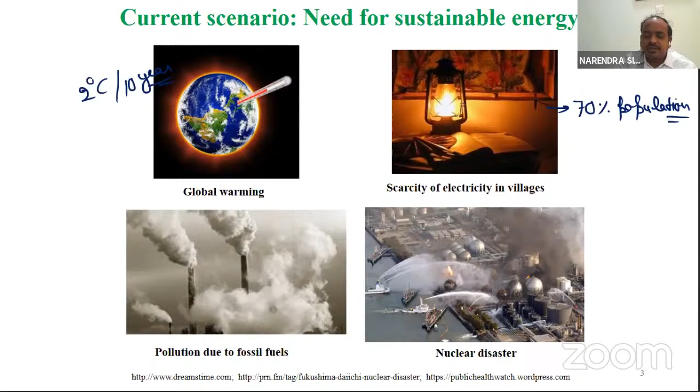Okay, so if I go for photovoltaic, right? Photovoltaic is a direct conversion of sunlight energy, that's light energy, into electricity. And from electricity we can convert into thermal energy and all other things, right? So world energy consumption is around 18.5 terawatt, and by 2015 it will be increasing, right? So here you can see the total reserves like coal, petroleum, uranium, natural gas. That is the non-renewable energy which can be utilized to get our energy, right?

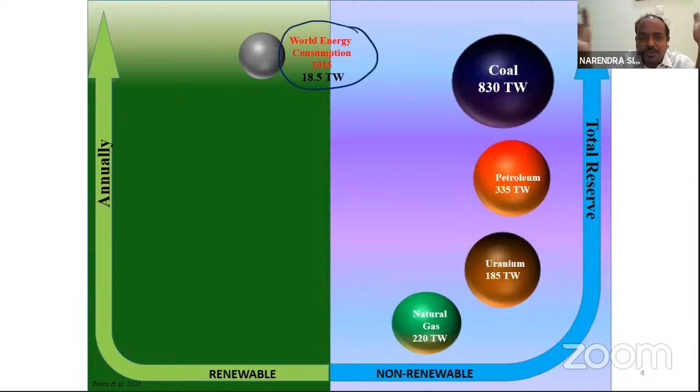So with the increasing population and increasing industrialization, because our life is like that, we need more and more comfortable things, right? But for comfortable things, industrialization will be there, right? For something like a pen, we require some industrial process, and then we require some energy there, right? This is electrical energy or maybe thermal energy; we require this energy, right?

So if I look at renewable energy, there is wind, biomass, hydro, geothermal, and wave energy. Wind energy is a powerful source where we can get the energy which is required for a particular region or maybe the entire world, right? But it will also be dependent on a regional basis, right? Sometimes we may not get too much wind, so that's why the production of this energy is less. Okay, but

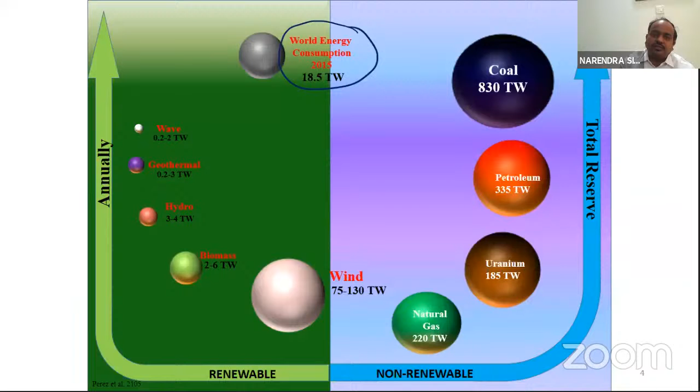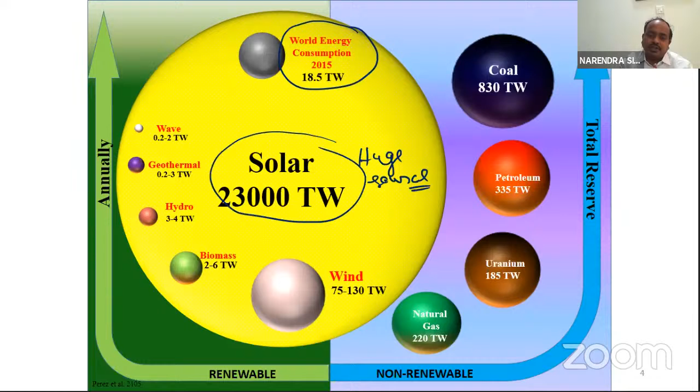if we come to solar energy, right? Here, our consumption is around 18.5 terawatt, but we have a huge source of energy, which, if we are able to extract 1% of it, even 0.1% of it, then we can fulfill the demand of all the energy, right? So let's see how to do that, right?

So how is it working? For that, we require a semiconductor device. Okay, I will discuss a little bit more about this: how photovoltaic generation works, how photovoltaics can be created, right? It is directly this semiconductor device which is converting light into electricity, right?

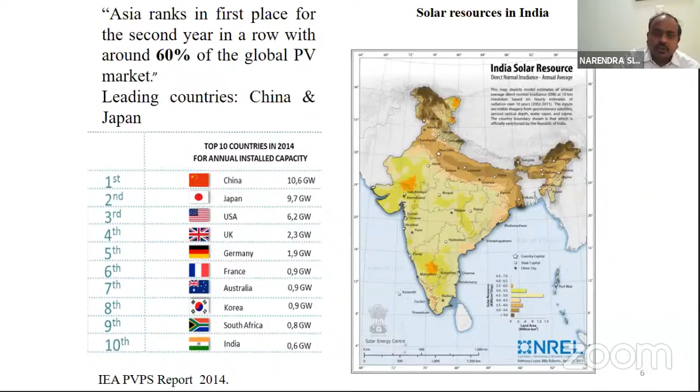So we are very, very far away, but I think right now the government has implemented many schemes on that. So we are increasing our strength, the solar energy strength, right? So yeah.

Here you can see the global scenario, right? Here is the requirement of energy in different sectors like transport, industry, non-combusted, buildings. So it is increasing day by day, right? Because of the increasing higher living standard.

So our global energy demand is increasing day by day, and also the industry sector consumes half of the global energy because they are producing a lot of things, right? Even sometimes when new things come, industry requires huge power.

Okay, so for simplicity, even for kids, a lot of types of toys are there, but to prepare them, we have to establish an industry, and that industry requires huge power. Okay, so mostly industry consumes half of the energy.

And also here you can see developing countries are resulting in more power demand, especially countries like China and India. Okay, so here you can see there are different types of energies, right? Renewable energy has increased in demand over the last few years, because for all other energies you can see the trend is low.

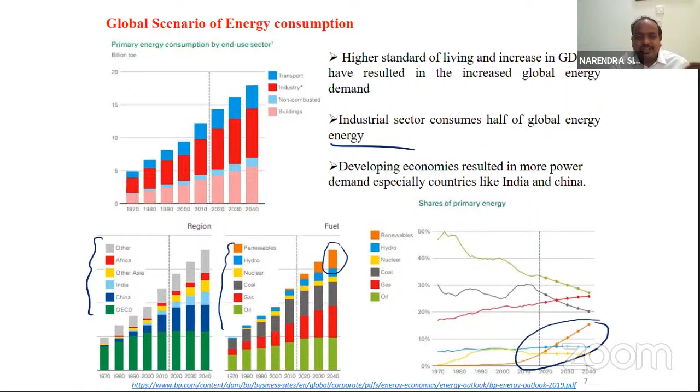In renewable energy sources, there are different kinds. So we will restrict this talk to only solar cells. Okay. So first, how does the solar cell work? Before that, we have to understand what solar energy is. Okay. So if I talk about solar energy, right?

So the sun is there, and then we are getting solar energy here on the earth, right? Outside of our environment, we are getting almost 1302 watt per meter square, right? But that is if it is just below the zenith angle, right?

Okay, you don't need to go into that much detail, but the average we are getting here is around AM 1.5. This is around 1000 watt per meter square, or 952. In most cases you will find 1000 watt per meter square. Okay, that is the energy radiating on the surface.

Okay, so our surface, right? So here you can see, outside there is a lot of energy, right? But due to the environment, there is a decrease in energy, right? So some is global energy, some is direct energy.

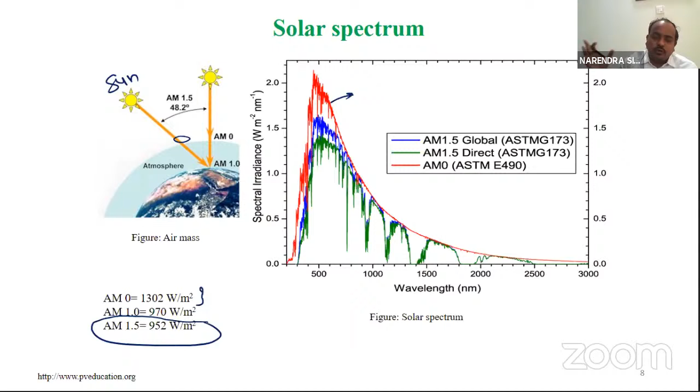Okay, so direct energy, which comes to the surface of the earth without any interference, is the direct energy. And some will come through diffusion by different molecules present in the atmosphere, right?

So here is this famous picture. Okay, I have taken this one from PV education. In that one, you can see that there are different layers. Okay, so these layers actually create some obstruction for that particular light, right?

So some of the light will directly fall on that surface, but some will be scattered due to the oxygen and water molecules in there. So they are reflecting back or maybe scattered. Some will be scattered to space, and some will be absorbed by these molecules which are present in the atmosphere. So energy is absorbed by the molecules.

So here these molecules are absorbing some energy, but a few of them are diffracting, right? So diffraction is happening. Some will be scattered up into space. Some is scattered onto the earth. That is called the diffuse reflectance.

So also here I will say that with the sunlight position the radiation is changing. So with the position the radiation is changing, so how our tracking of the sun should be, right? And if we have fixed photovoltaics at one angle, what is the angle at which we will get the maximum solar energy?

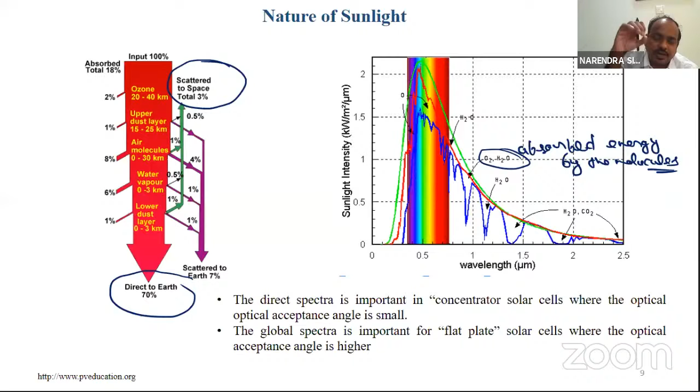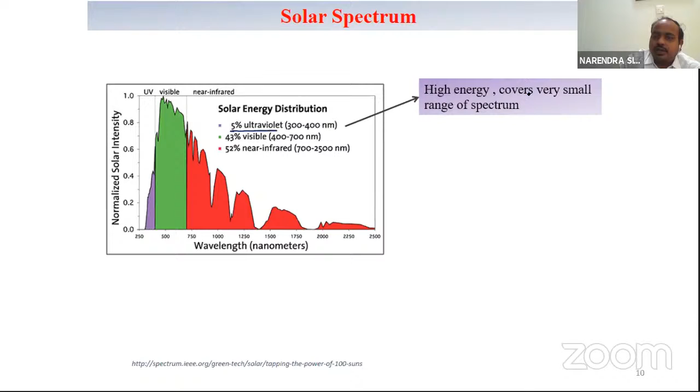So if I talk about solar energy, you have seen solar energy graphs like this one. So here are the high energy photons. When the wavelength is low, it means hc by lambda, right? So lambda is low, then there are high energy photons. It is a very small range of the spectrum actually, only about 5% in total, the ultraviolet.

Here in the infrared, that is low energy, with more optical losses, like heat, right? So infrared is nothing but heat energy.

Jiten? Yeah, I think some disturbance is there.

So here there's another one, yeah. This is the visible light, where there's the maximum possibility of utilization of the light, because it is not low energy. The photon energy is in the medium range. So we have to choose a semiconductor that can utilize more and more of these photons.

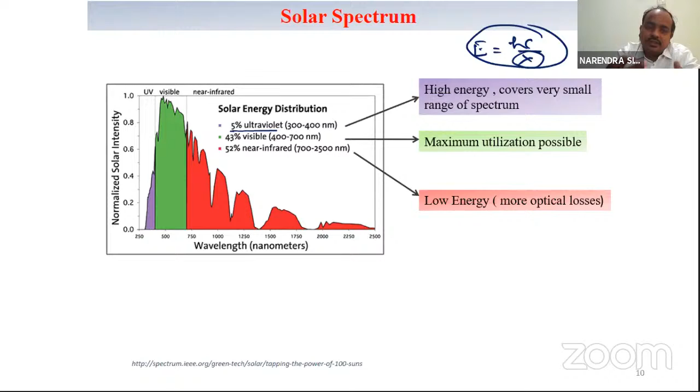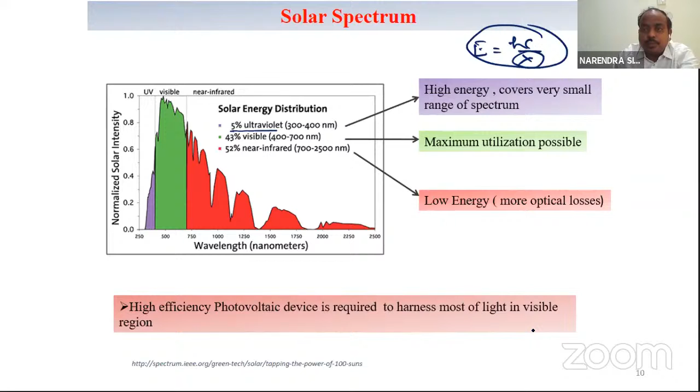So high efficiency photovoltaics are required to harness most of the light in the visible region, and if it can go into the infrared region, that's much better. So if I talk about how solar cell operation happens, there are two different semiconductors, like a PN junction: one is P type, one is N type.

When they come into contact, the Fermi level will become the same, and then there will be band bending. In this band bending an electric field is generated. So under the light, the electron is excited between the valence and conduction bands, then it goes to the n type semiconductor, and then to the collector, and then we can extract it, right?

So here you can see the low energy photons will not create any electron and hole pairs, so that has been lost. So we have to optimize the energy band gap so that we can extract more and more electrons, right? Later I will also discuss that.

So in the basics, it's an electronic device that converts sunlight. Till now this is our summary of solar cell basics. An electronic device that converts sunlight into electricity, and we are primarily using the PN junction type. There will be one intermediate layer. And here, what are the different steps?

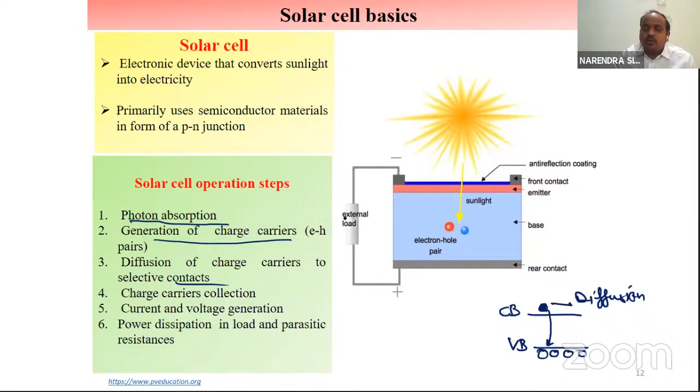So here there's the front contact, rear contact, and then we are getting this electron and hole pair. Here we can put some external load. Okay. So charge carrier collection is happening on this front contact. And then power dissipation in the load, whatever external load is there. Okay, similar to this.

Right. So one is the electrons in the conduction band, this is the valence band. Sometimes this nomenclature will be different for organic photovoltaics. So here is the conduction band, and then there are two layers, right? One is the electron transporting layer, one is the hole transporting layer. So one favors only electrons transporting through it, and the other favors holes transporting through it.

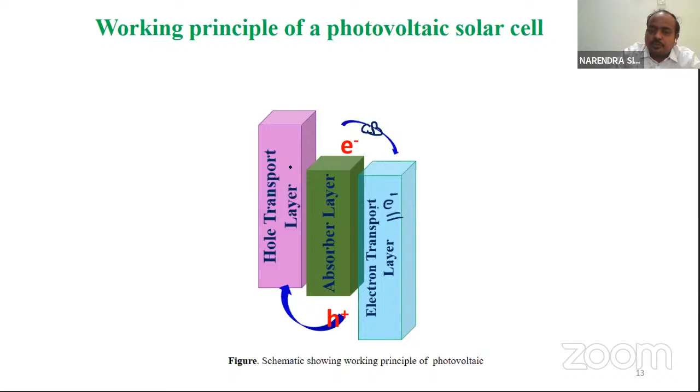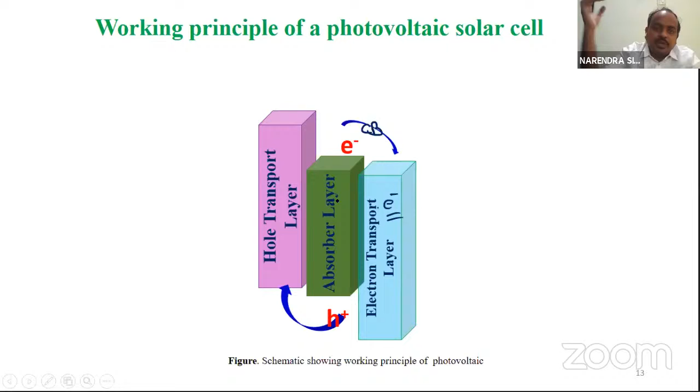So if it is separated out from here, then it will not recombine again. So we are extracting the electrons and holes from that particular photon, right? Using this photon, we are extracting electricity. Then electrodes will collect all these electron and hole pairs, and then we can get energy from that, right? So here we can use any load, and this can be stored as well. In the new era, batteries are also developing along with solar cells, right?

It is also written as JSC in some cases, right? So here it is converting very high. Electron and hole pairs are created because it is generating too much. It consumes a lot of photons, and that's why it's creating a lot of short circuit current. Okay, current is generating. But what about the voltage?

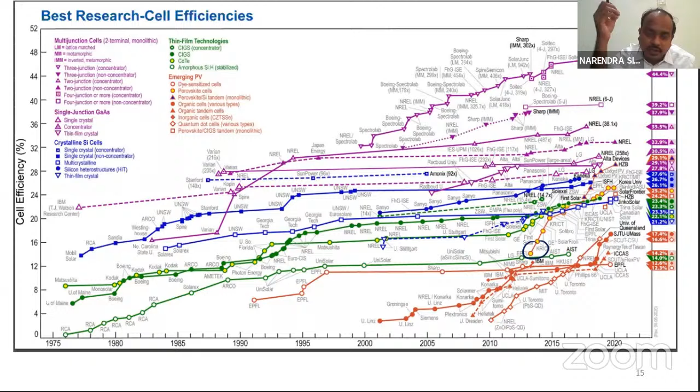So in the third one, that's the emerging photovoltaics. There are different ones - dye sensitized, perovskite, perovskite-silicon tandem solar cells come into the picture, and quantum dot perovskite. I will discuss all these one by one with how this efficiency has been increasing. Silicon solar cell is showing around 26%, and this perovskite solar cell started developing around 2009.

Although it's not written here, it started around 2009 and is increasing very rapidly. So that's one point where we have to think about which is much better material for photovoltaics. I have already discussed this: eta is the efficiency, which depends on ISC, VOC, and FF, the fill factor, and the incident photon energy. For higher ISC, we require a lower energy band gap, because we want more efficiency, which we have to maximize.

Efficiency we want to maximize, right? So if we want to maximize, then the simple rule is: ISC should be high, VOC should be high, and also fill factor should be high.

If I want ISC high, then lower energy band gap is required. If I want higher VOC, then we need higher EG. This relates to VOC equal to KT by Q, ln of IL by I naught plus 1, and I naught depends on EG. So if EG is higher, we will have more VOC. So these are two contradictory things.

So that's a contradictory situation. We have to take some band gap in between, not too low, and not too high.

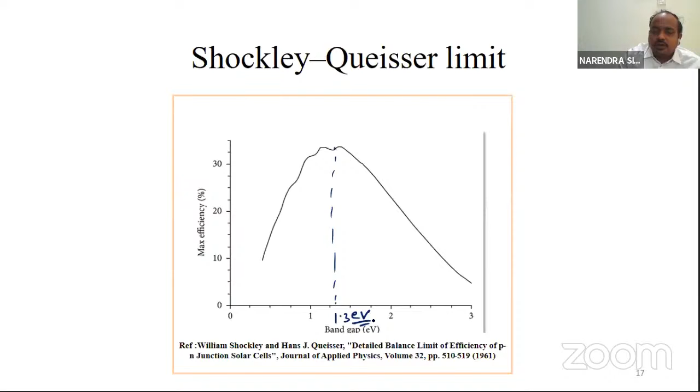JSC and VOC are the two parameters. When the band gap is low, JSC will be high but VOC will be low, so maximum efficiency is not achieved there. It's somewhere around 1.3 to 1.4 electron volt, which is the best band gap for photovoltaic applications.

There are different losses: fundamental losses like loss due to reflection, loss due to low energy photons, loss of fill factor and voltage, and loss of excess energy photons. These are fundamental losses we cannot do much about, except through material fabrication, to utilize more and more of these photons.

But if I talk about technological issues, there's loss due to reflection, loss due to insufficient absorption, and loss due to recombination. These are the challenges.

If loss is happening due to reflection, we can use some anti-reflective coating to achieve higher efficiency. For insufficient absorption, we use material with high absorption coefficient. But while having higher absorption, we need to ensure electron recombination doesn't happen, so good transportation properties should be there.

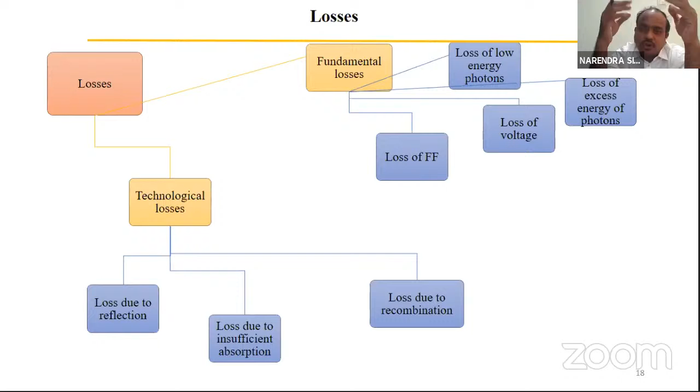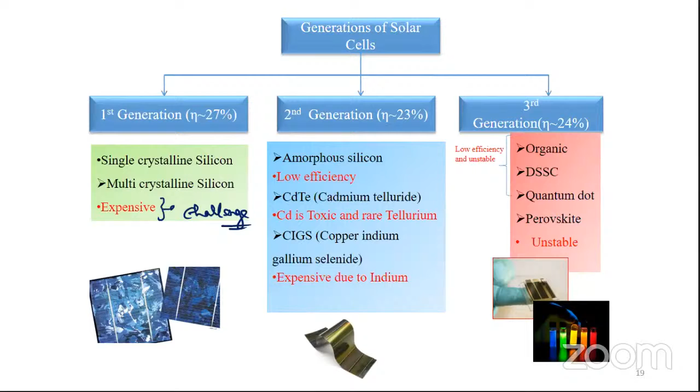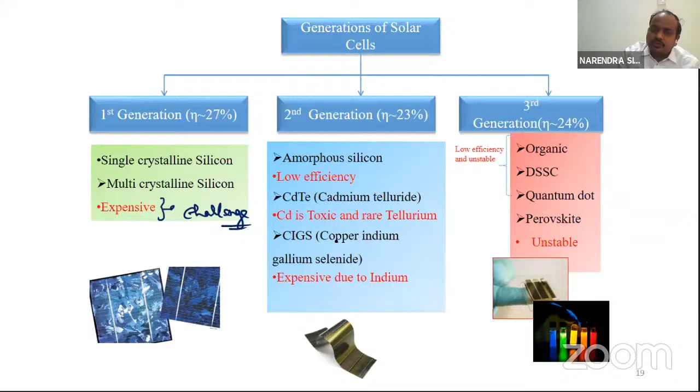In the second generation, amorphous has low efficiency, and CIGS (copper, indium, gallium selenide) is expensive due to indium, which is a rare material, so we cannot use it widely. Amorphous also has low efficiency, so further challenges are there. And there's CdTe, with cadmium being toxic and tellurium being rare.

In the third generation, there's organic, quantum dot, and dye-sensitized solar cells. Dye-sensitized means TiO2 is sensitized with some dye, creating electron-hole pairs, but this has low efficiency. Organic solar cell also has low efficiency and some instability.

But with quantum dot, there's a lot of scope, as it can be tunable as well. Perovskite also has tunability, meaning the band gap is tunable with changes in material configuration. But instability is a challenge here, although efficiency has been increasing very high.

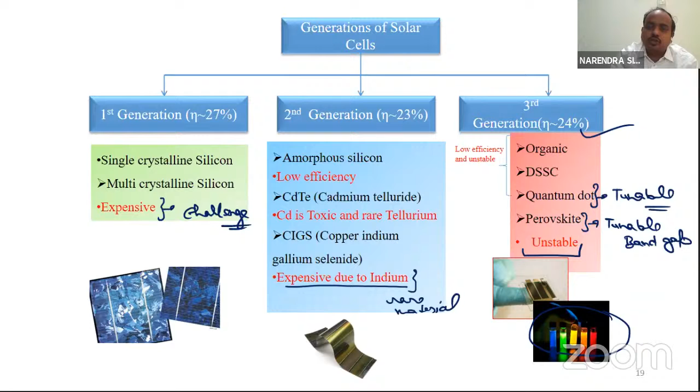All this discussion is about single junction solar cells, not multiple ones. The tandem solar cell efficiency is up to around 48%, where 2-3 materials have been developed and used one above the other. In the first generation, like silicon solar cell, there are three different types: monocrystalline, multicrystalline, and amorphous.

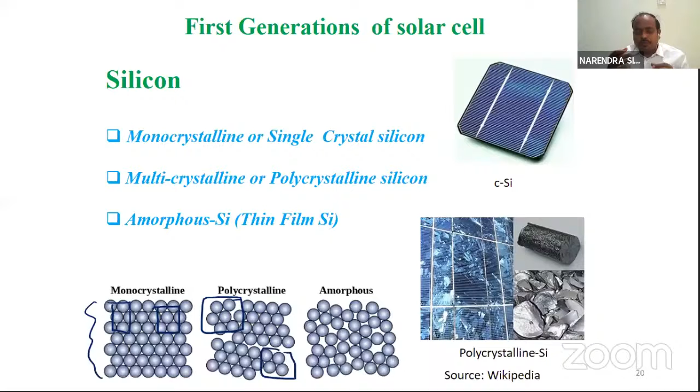What is the reason for that? If an electron-hole pair is created, in monocrystalline they can transfer quickly. But here, gaps are present, so defects occur and recombination can happen. In amorphous material, this recombination is much more.

This amorphous silicon is obtained by depositing a silicon film on a substrate like glass. Here you can see an example. We use amorphous silicon because it doesn't require too much energy, so even with limited energy it works fine for applications like calculators.

But for particular applications where high efficiency is required, crystalline silicon solar cells like monocrystalline are used, though these are expensive. Polycrystalline materials are mostly utilized in domestic applications. These are the types of solar cells.

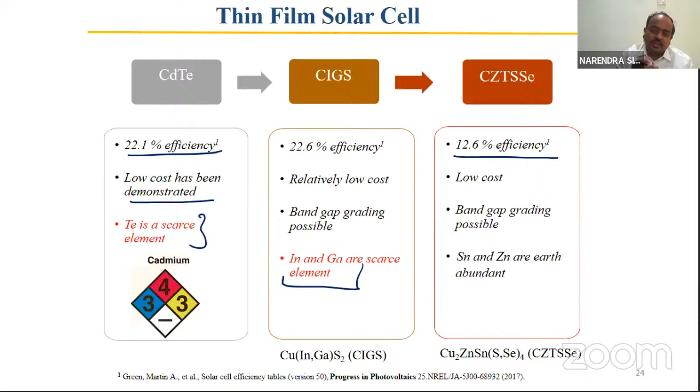So further development came with Zn, using Zn and Sn in place of indium and gallium, but the efficiency at that time is low. Although it is low cost, the efficiency is low, so it cannot be utilized for industrial applications. So that is the point.

Here you can see this thin film solar cell shows different x values. The compositional property can change the band gap, so there is tunability in the band gap. Tunability means we can utilize it for absorbing low energy photons as well as higher energy photons. So we can tune that property.

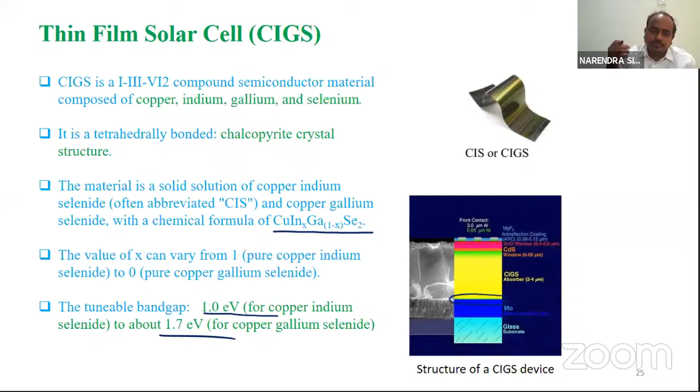And here you can see there are different layers. The effect of different layers is also a research interest. Here you can see the typical structure is like this one.

This is the electrode, this is the substrate, and this is the main layer where electron and hole pairs are created. This is the n-type layer where electrons move, the electron transport layer, then the top electrode where electrons are collected. Similarly, on the other side we collect the holes. These layers are typically about 2 micrometers, while in silicon solar cells this is up to 100 to 200 micrometers, so it can be replaced with a very minimal absorber layer.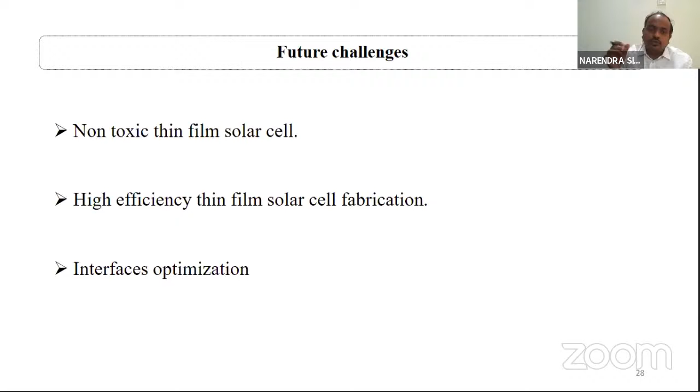So here are the future challenges in this type of solar cell: high efficiency thin film solar cells with elements available in huge amounts; non-toxic materials, since we cannot utilize Cd or lead; and interface optimization, since we have seen copper diffusing into another layer, so we have to optimize this interface.

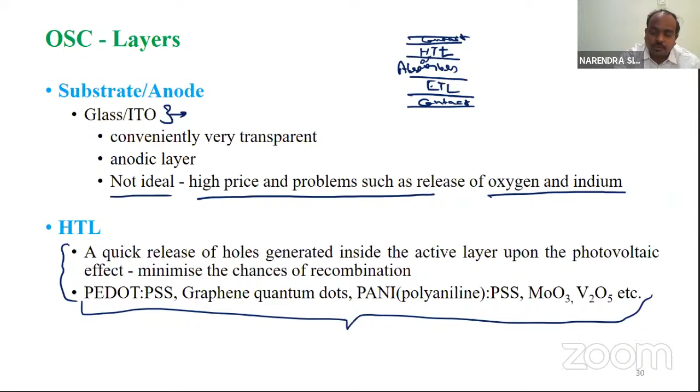Okay, another one, the main heart of the solar cell is the active layer, the absorber layer, where the electron and hole pairs are generated. All other things are required to complete the structure. These are all organic polymers, like p type and n type, a combination of these two, prepared from acceptor and donor materials in the bulk heterojunction. Here one is the acceptor, one is the donor.

This is the lifeline, that's why I'm saying it is the heart of any solar cell. The acceptor and donor materials are there, electron and hole pairs are created, so one is taking and one is releasing. Then we have to collect them at some electrode, like calcium, aluminum, Ag, gold, platinum. Right now some work is going on using carbon type materials for the cathode and all that.

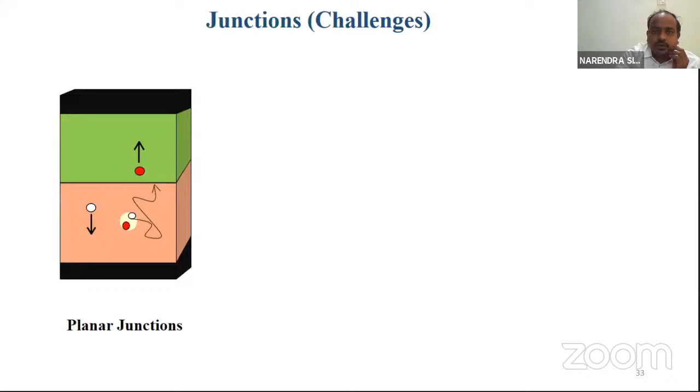So these are the challenges, in the planar junction. Here electron and hole pairs are created, but it takes time to pass through, so before that they may recombine. So people started thinking a lot about how to increase efficiency. Like a checkerboard type, with two different materials, like PEDOT:PSS, used alternately, so electrons can move very quickly to the electrode, and similarly holes.

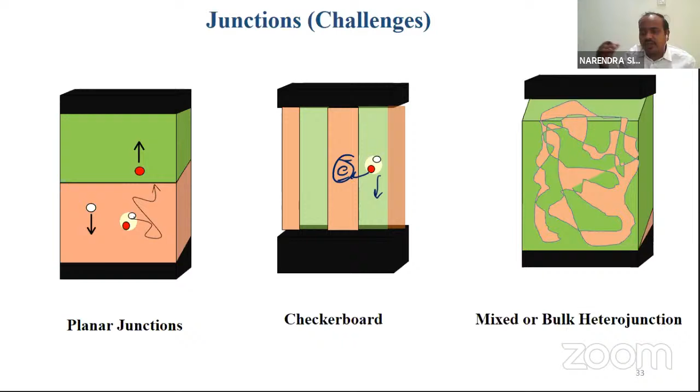And here is the mixed bulk heterojunction, where both are blended, and when electron and hole pairs are created, one moves in one polymer and the other moves in another polymer. But diffusion is one problem: the diffusion of excitons is very low, and the short exciton lifetime of this semiconductor is limiting it. So this is the limitation with the active layer.

When there's more thickness, more active layer, more charges will be created, more current will be there, and better efficiency. But we cannot go for higher and higher thickness. The diffusion length of excitons is very small, so all the excitons, the electron and hole pairs that are created, will recombine again. So that is the point.

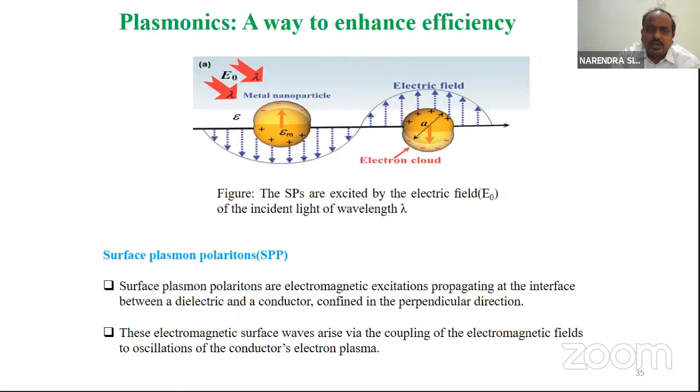I will skip this one. That's plasmonics, which is one way to increase the efficiency. Here it works as anti-reflective, so more light can be absorbed. Another point is the dielectric: these metal nanoparticles can create dielectric layers. That's why there's improvement in electron-hole pair recombination, and separation and transportation of these electrons will be easier.

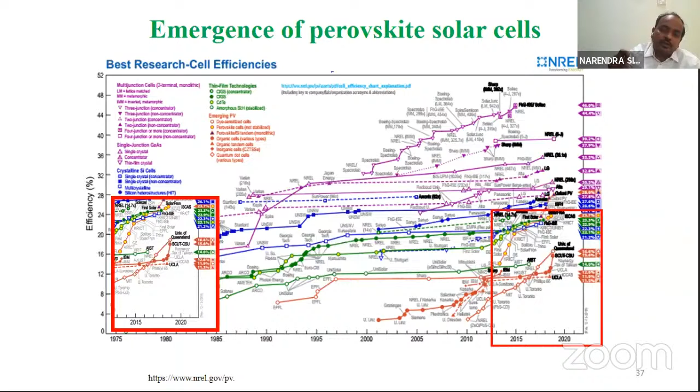So the next generation, the third generation, is perovskite structures. That started around 2009 and then went into the use level. Right now around 25% is the maximum efficiency. The motivation behind this is that efficiency rose from merely 3.8% in 2009 up to 25% in 2019, and it is comparable to the silicon solar cell.

These are solution processed, because we are using PbI2 and organic and inorganic halides, putting that on by coating, and then generating the solar cell. But in the case of silicon, we create monocrystalline silicon through a different process, so it has a huge cost. Here the cost will be low. Low temperature, because we create this at room temperature only. It is also scalable, and the Shockley-Queisser limit is around 30%, so we can further increase the efficiency. High absorption coefficient, mainly in the visible range.

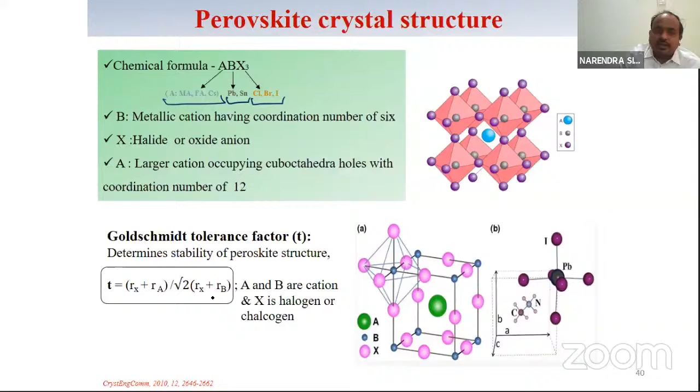So what is this structure? It is ABX3. Mostly utilized are MA, methylammonium, formamidinium, cesium, Pb, Sn, chloride, bromide, and iodide. With these changes you have to check the tolerance factor of A and B. If the tolerance factor is not in a certain range, then it will not form.

Second one is the tunable band gap. The tunable band gap is playing a role here. And here there's long diffusion length. So the highlight actually is the long diffusion. If you remember, in organic photovoltaics the diffusion length is only up to 10 nanometers, right? But here the electron and hole pair can go up to 100 nanometers.

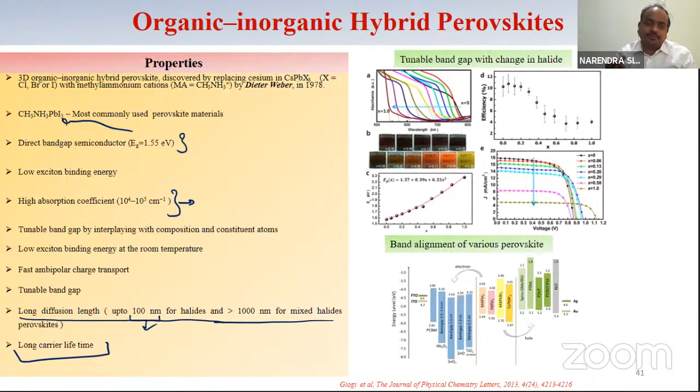Okay, and longer carrier lifetime. So the transportation of these electrons and hole pairs will be easy; they will get more time before recombination. So that is the point.

The materials here are like CsPbI3, with changes in the chlorine concentration and other material concentrations, right? In the electron transport layer, like TiO2, SnO2, PCBM and so on. The hole transport layer is where hole extraction and hole transportation is carried out. That is Spiro-OMeTAD type of materials, right?

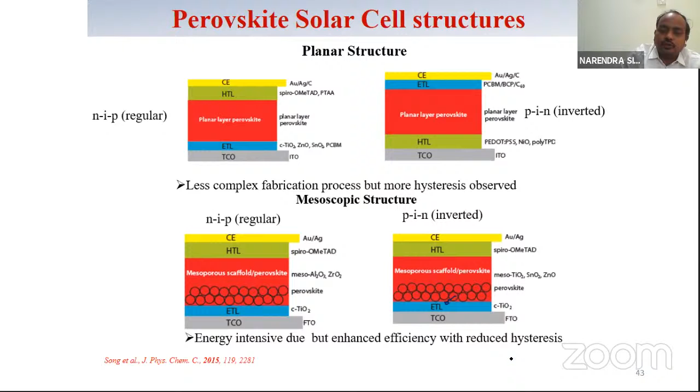Okay, so the electron transport layer. There are different types of materials, like organic and inorganic. These should also match with this one. Here there are different band gaps, you can see. Mostly WOx or SnO2 are good materials which can be utilized for that.

Here you can see the electron-hole pairs generated and moving from here. For the improvement, because this contact is here, these are electrons under illumination, and you can see the electrons moving much faster. So band alignment is one criterion to check. That is the challenge: which materials we have to utilize.

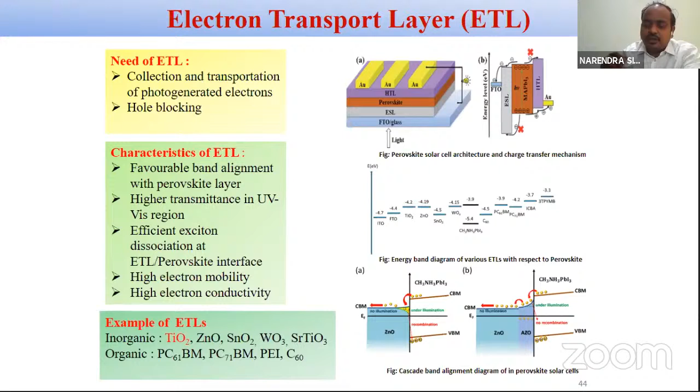Okay, so there are different methods of coating, like one-step coating and two-step coating, how they behave, and which one will be better.

Okay, so here in the one-step coating, the main thing is that it's a faster and simpler technique, because we are using only one step, right, and gives efficient and low cost perovskite. Okay, but here there is poor surface coverage, so efficiency may be low. There are a large amount of shunt paths that allow contact between the electrodes.

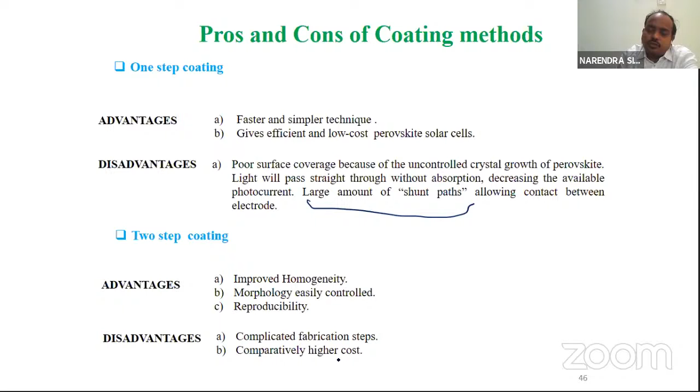Okay, in the two step, this improves homogeneity. Morphology is easily controlled, reproducible, and complicated fabrication steps. Two steps are there, so higher cost is there. Okay, so here you can see with the one step coating, there are a lot of these types.

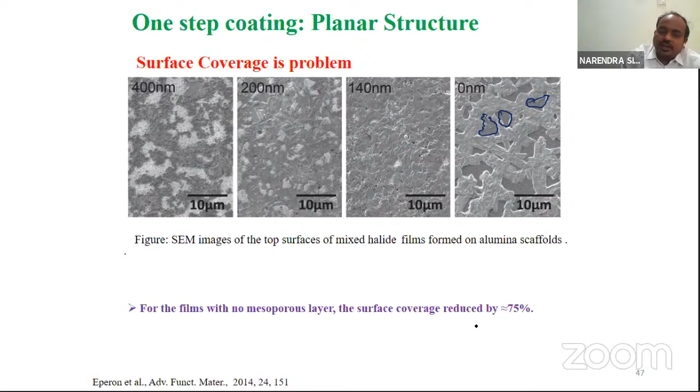Okay, so these are the pinholes, so leakage current will be there, right? So shunting can happen. That's why this is not a good film, right? But with no mesoporous layer, the surface coverage reduced by 75% compared to that. These are the things that have to be kept in mind, right?

So another method is the fast crystallization deposition method. Here we utilize a second solvent and then create this crystallization process, but we are controlling this crystallization process. So here you can see there is not any gap, right? So that is a much better film. If it is a single film, then it will be much better.

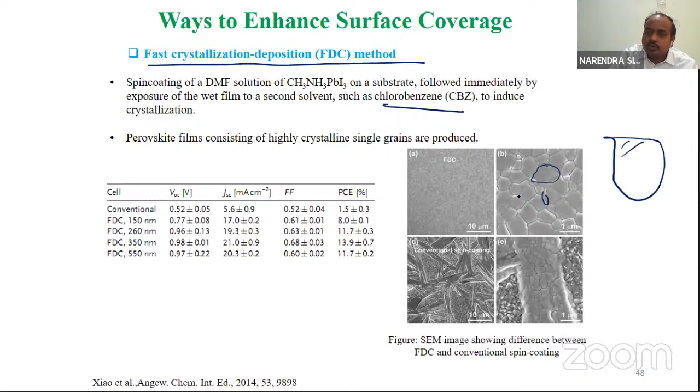Okay, because here the electron and hole pairs are created, but at the interfaces they can recombine. That's why the silicon single crystal, because there is homogeneity across it, the electron and hole pairs can easily move within it. So improving this film quality will increase the efficiency of that particular solar cell.

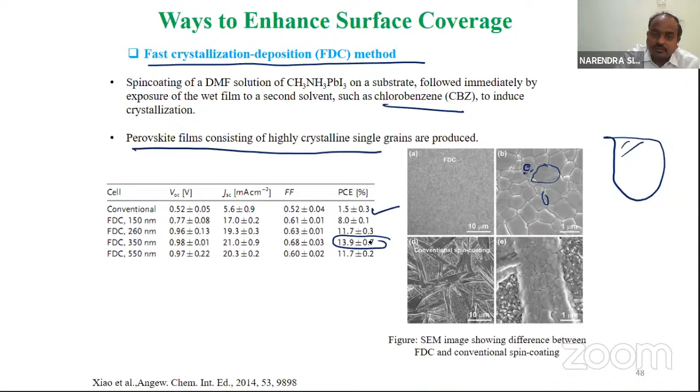Okay, so here you can see this with the different perovskite. Here the efficiency has been increased up to 13.9. For the conventional, it's only 1.5, but using chlorobenzene and improving the film quality, this efficiency is increased up to 14%, right? So another method is this one, that's solvent engineering, right?

Any question? Yeah. Okay, so I will come back to it later. What is the time? Okay.

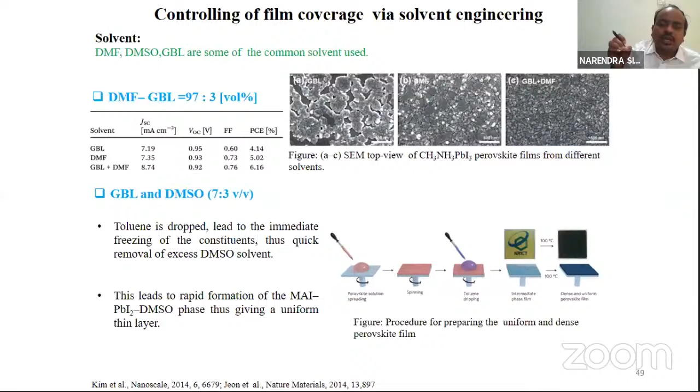So in solvent engineering, different solvents can be utilized. With the solvent, we are actually changing this crystallization process, the crystallization and how the growth happens. So we are controlling those things, right? That is the point here. Okay, so like here, this one.

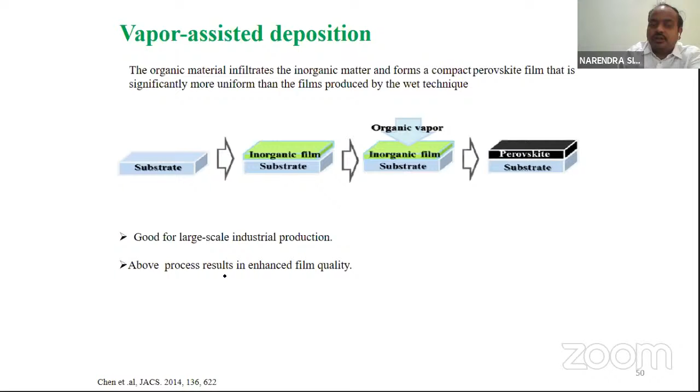And this one is the vapor assisted deposition. Here in the inorganic film, PbI2 is there, and then we are providing the organic, the CH3NH3I, and then the perovskite film is forming. It's much more uniform, so good for large scale industrial production, and this process results in enhanced quality. Another challenge in this perovskite solar cell is the high temperature annealing, right?

The temperature annealing is of only the ETL, right? Not all the material, only the TiO2 layer or ZnO layer needs annealing. Another thing is, these are the challenges: moisture stability, thermal stability, UV stability, lead toxicity. Hysteresis I did not talk about, so just for forward and reverse bias, there is a hysteresis. Just for your information.

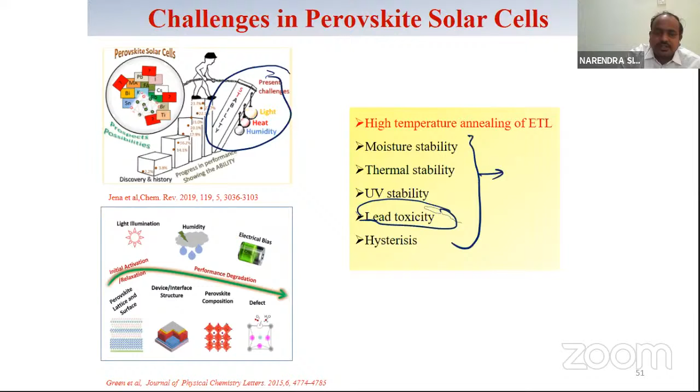So here stability is one problem. The present challenge is this one, right? Stability is one issue. Another issue is the lead toxicity, if we can remove that particular material, right? Okay. So here you can see with the initial activation, the performance is directly degrading with light, humidity, and biasing, because with charging and discharging, its efficiency is decreasing.

Here the CsSnI3 has been utilized. The band gap is okay, the absorption coefficient is okay, and low temperature processing is okay, but efficiency is still low. Researchers are thinking about how it can be improved further.

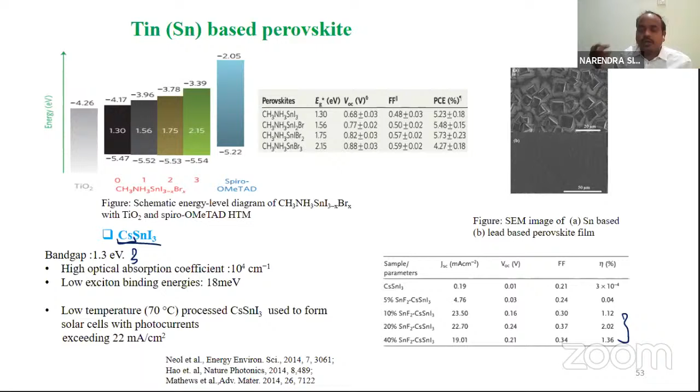Another challenge is the development of perovskite solar cells outside of the glove box, because mostly these are prepared in the glove box utilizing low temperature technique. There's interest in investigating the effect of low temperature annealing of TiO2 in the oxygen environment, to see how it can improve the efficiency of the perovskite solar cell or how it will affect the solar cells.

The huge challenge is that it's particularly lab scale - how to increase this efficiency, and how to scale up that process.

If I talk about scale up for the commercial scale, it should be durable, efficient, and low cost, with fast processing technique. If you want to produce the solar cell for any domestic or industry application, it should be stable, efficient, and low cost - these are the three things, to produce economically. So there's recent research on operation stability of the device - why the device and material breaks down over longer time.

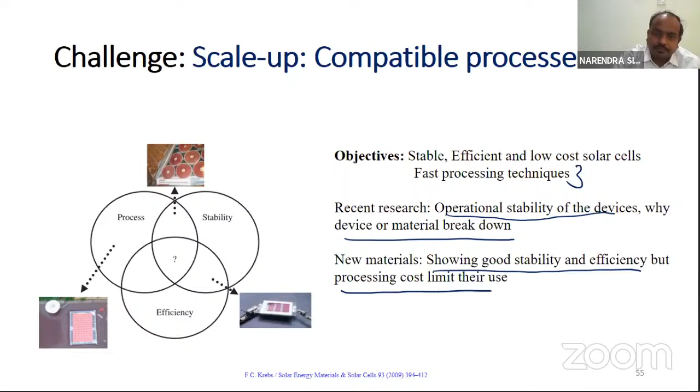There are few fabrication processes where much more research has not been done at the lab scale. Fabrication techniques like solution based, vapor assisted - like physical and chemical vapor deposition - can be carried out. There's also solution based coating and printing technique, and roll to roll technique.

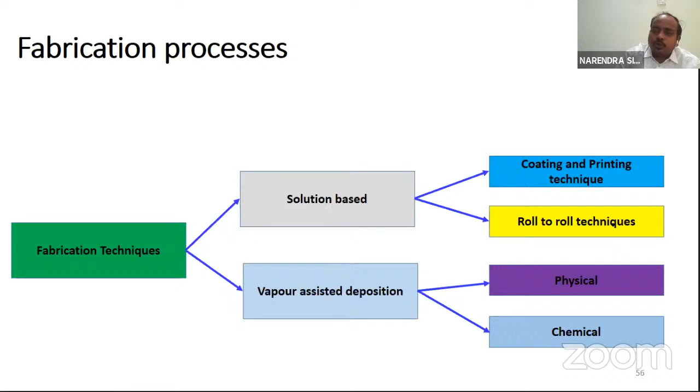Coating technique, like a rubber stamp - similar to an office stamp, we have a rubber stamp that we can use. Similarly printing can be done: a layer of ink is transferred to the stamp and then to the substrate by a reversing action. Different stamps have been used for this.

So this type of technique can be utilized at the lab scale, making scale up easy.

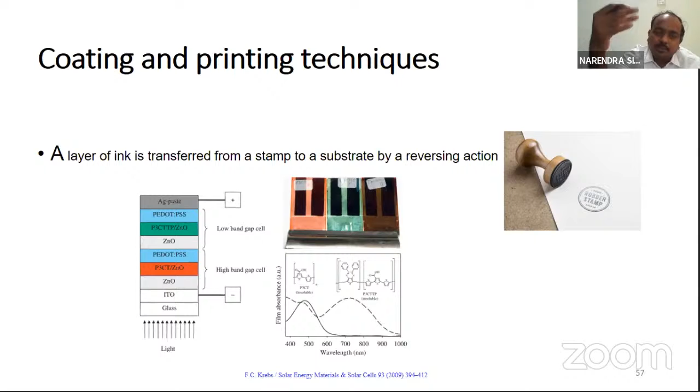Second one is like casting, mostly done at lab scale. Here the advantage is no equipment is needed except a very horizontal surface - the procedure is simple, and it's possible to prepare good quality film. But there's thick film and homogeneity issues, lack of control over film thickness, low control over edges, and precipitation during drying. These are the things which restrict this application in the casting technique, which is mostly used at our particular lab scale.

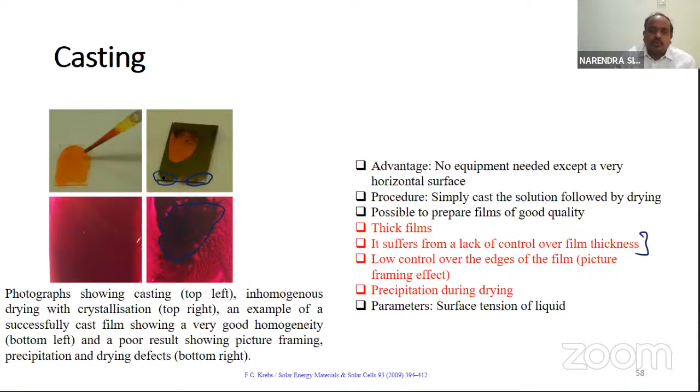Here this dye or solution has been pushed here, and then it is moving and spreading. A sharp blade is spreading at a fixed distance. Typically this can be fixed into 10 to 100, 500 millimeters. The final wet thickness is ideally half the gap of it.

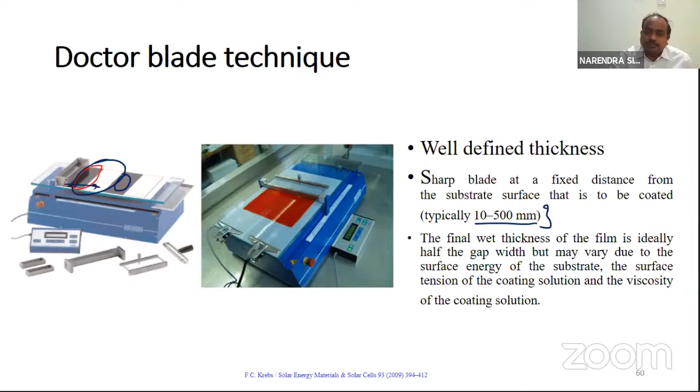So in screen printing, there are three things - here, print ink. The open area is filled with ink, and then it is transferred to the substrate. This is one kind of technique where two-dimensional patterning can be done, with no loss of the coating solution.

But these things have not been available because research has not been done too much on screen printing. So mostly we are using our conventional methods like sol-gel and spin coating. But still a lot of things have to be optimized on these.

So a screen of woven material, like synthetic fiber, has to be framed on this, and then we can form the solar cell layer by layer. Mostly the ink should be some polymeric type of solution - it should not spread all over. So solution preparation is another problem.

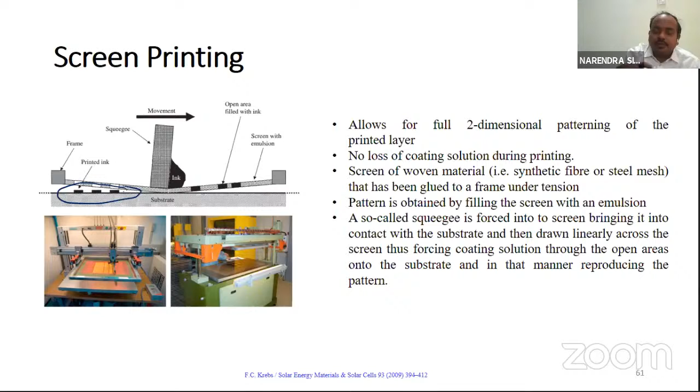So how much viscosity is needed for this screen printing? Viscosity can play a role, because otherwise the splitting will not be uniform.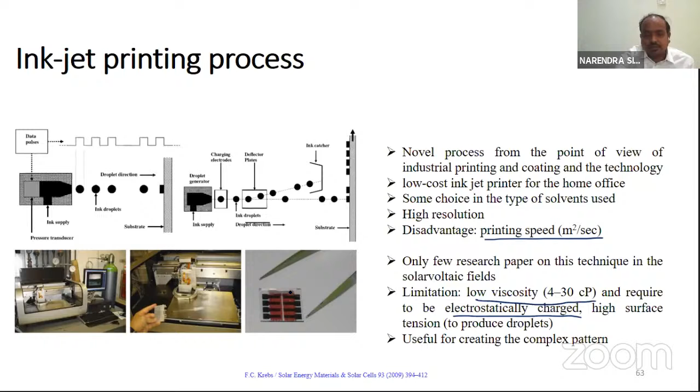Okay, I will remove this one. That's the roll-to-roll technique. A few roll-to-roll techniques - one is the knife-over-edge, which is simply doctor blade coating. So here we just have this knife, and ink is fed and then this comes to the picture.

Here the ink is fed through this slot, and then it moves along. The knife is creating that layer. Ink is fed from this point - first it is transferred onto this surface, and then further it is transferred onto this one, so a reverse process is happening there.

Here also liquid is required of low viscosity, because if it is highly viscous then sometimes there may be a jam. But here there's no wastage of ink. These are the things which are much more controllable.

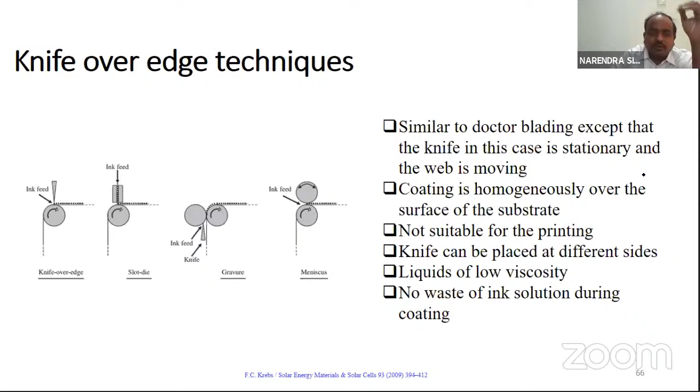So here this web is moving, and this knife in this case is the stationary one. So we are creating a slot die. A die is put on this one and then we are rolling it, and perovskite structures have been created, or any other type of layers can be created. So here this gives uniform and controlled thickness. But controlled thickness means we have to go for lower and lower thickness. That's another point - how to design this slot die so that we can go for the 200-300 nanometer thickness film.

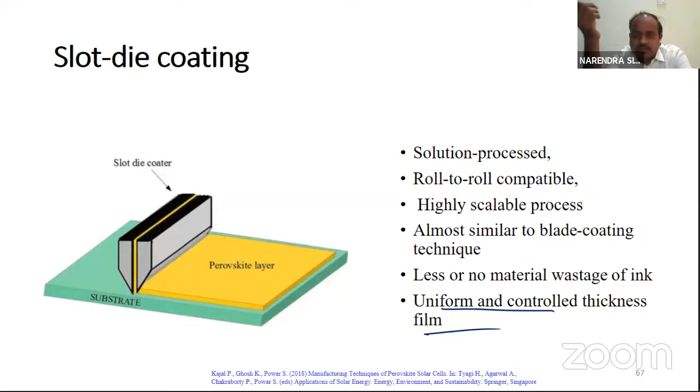So this one is for the multi-layer. Multi-layer means this is the curtain type. We have put 3 dies, one above the other. It is moving like that, and then we get this - we can create the whole structure rapidly. But the point is that with these techniques, it's difficult to ensure diffusion cannot happen with these layers - that's one point we have to think about. What is the viscosity of all 3 inks?

So that diffusion cannot happen - each layer by layer will remain the same, and high quality layers will be created.

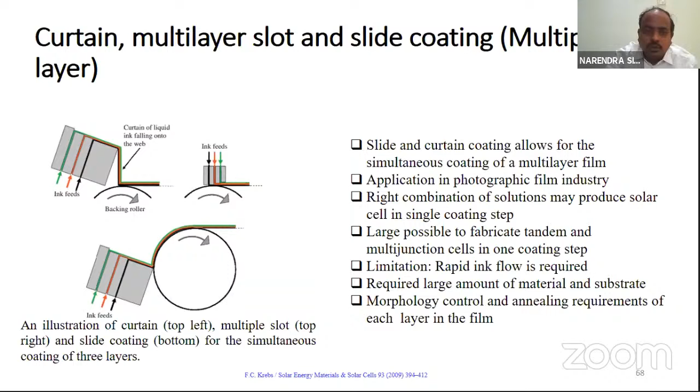This one is not a part of it. So this is the comparison overall - here this ink waste is very high, so we cannot do this patterning here. Patterning is possible on these highly - this one, inkjet, is highly patternable.

So whatever type we require, we can do that. But here there's again a problem - there's different ink viscosity. Speed required is slow for this one. Here speed is not a matter, but here the speed we can increase, and here this also increases. But these are like these two - here the speed is low. Although this is very patternable, speed is low, so production will be less.

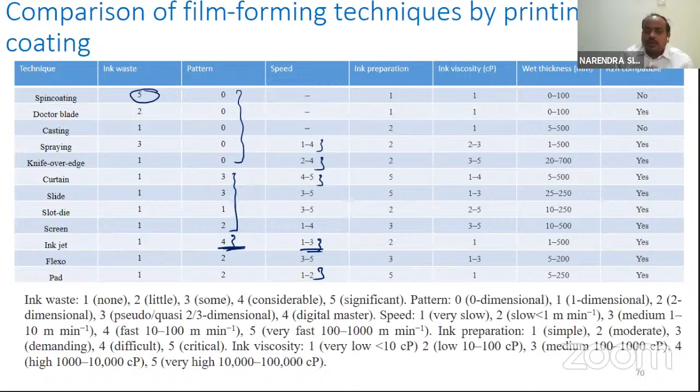And also in this ink preparation - one is the simple one. For these, whenever this is there, it's very difficult to prepare, meaning the viscosity - we have to check all the parameters. This ink should be coated on that substrate, otherwise if ink parameters don't match, then it will not coat. Another point is ink viscosity - there are restrictions on that, and you can see the limitation. The thickness, whatever it is - but sometimes we require the thickness between very less than nanometers, so at that time we require this particular one which can be utilized.

And roll-to-roll compatible - there's one solar cell, and then the second solar cell comes; that is the type of roll-to-roll technique. So whatever - spin coating and casting are not roll-to-roll. Others perfectly match with the roll-to-roll technique.

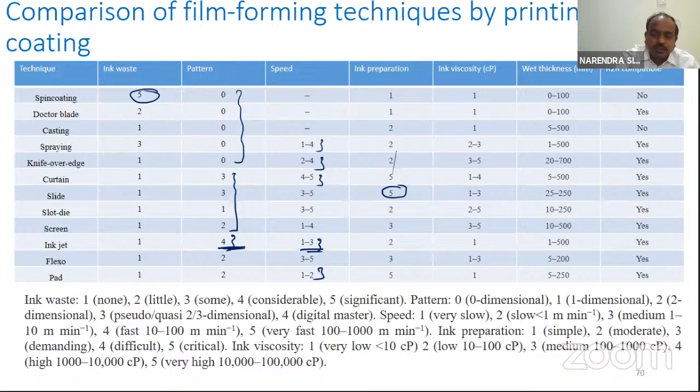So for industrial scale, that's the second type I've told about - vapor assisted. In vapor assisted, this evaporation can happen. Vapor process, solution process, flash evaporation can be carried out, and then we can create different types. Like here, source one and source two both are evaporated, and it's depositing on the substrate, and also this reaction is happening there.

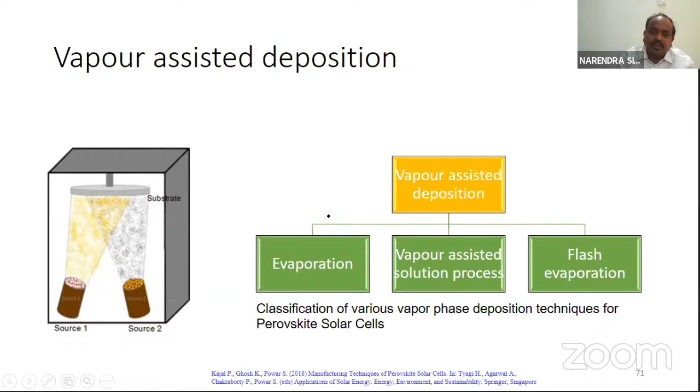Because this vapor is there, right? But it is efficient, or you may say pinhole-free perovskite, so film quality is very high. But due to this vapor, there will be losses. So high material yield and scalability is required. So here it is highly uniform, pinhole-free, large grain size, large carrier lifetime in the sense of perovskite only.

But here there's another requirement: it requires very high vacuum and also uniform co-evaporation of these materials. Like these two materials are there, then uniformly. Like in the thin film solar cell, like CdTe, we are creating that one. Cd is there, Te is there. We are putting that and evaporating that, then they are reacting on the other surface, that's the substrate. So that reaction should be controlled.

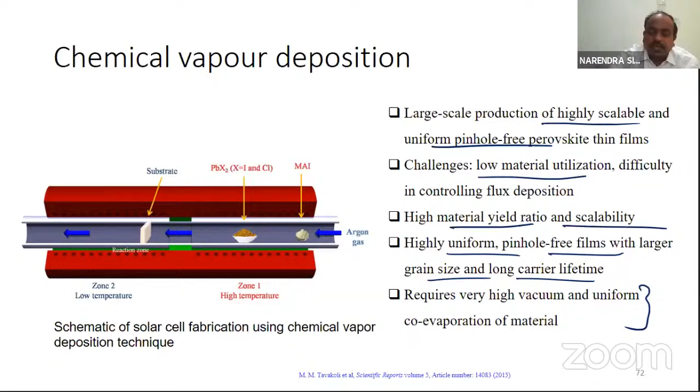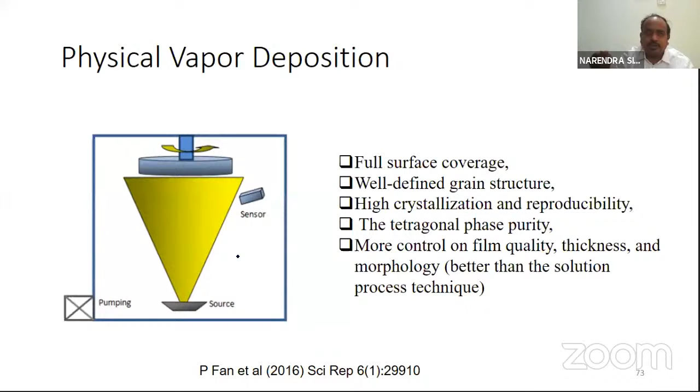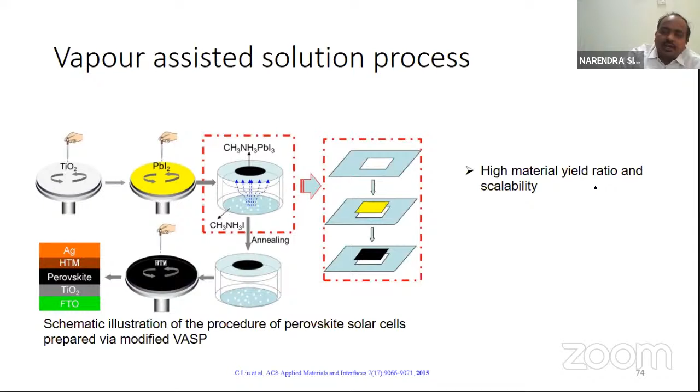So this one is vapor assisted. I think I already told about that one in the first one. Only this PbI2 first we have put, and then we are creating this vapor of the CH3NH3I, and then annealing, then the perovskite layer is there. So high material yield ratio and scalability.

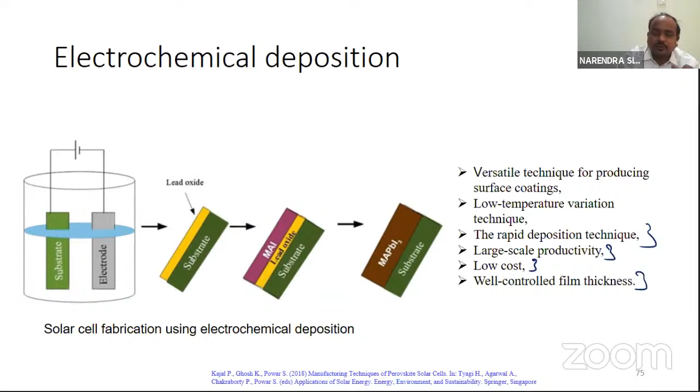Another technique is electrochemical deposition. Using that one, lead oxide is there, and deposition has been carried out electrochemically. This is quite a good technique, low cost, large scale productivity can be done. Rapid deposition, well controlled film thickness, and also a low temperature technique; we don't require very high temperature for producing the surface coating. Although it is not much explored till now, so that should be explored later.